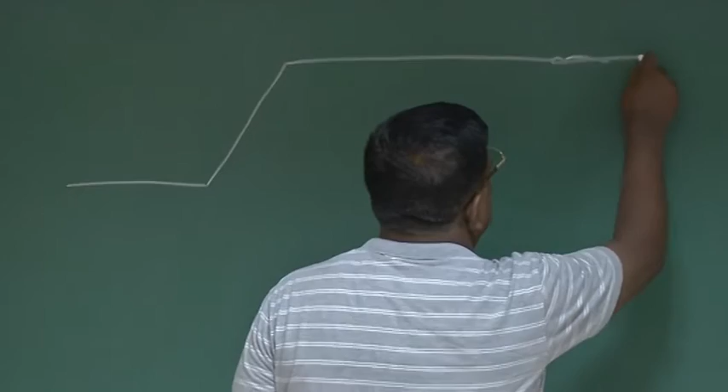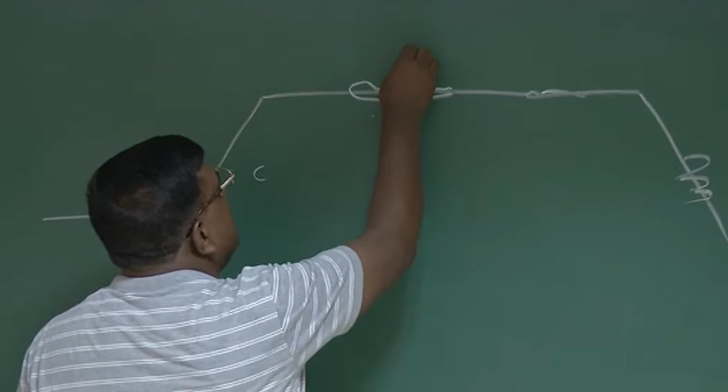And if I try to again pose this problem, we have distinct phases of flight. By now you know, this is takeoff, this is climb, cruise, landing, then maneuver. Now let us take a case when here I am cruising, where lift equal to weight and drag is balanced by thrust.

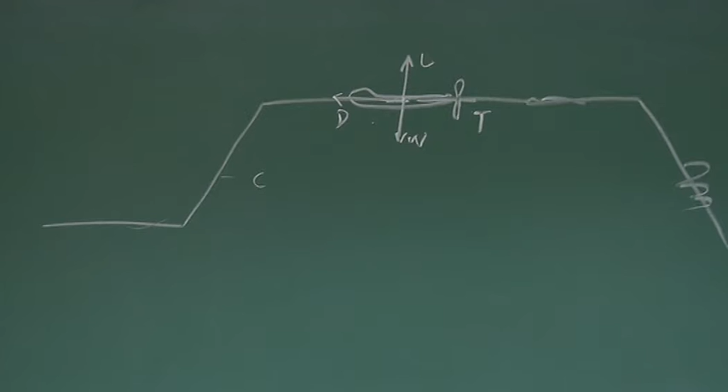We have been always telling that this is unaccelerated flight, unaccelerated rectilinear flight. One thing was net force is zero, the summation of all the forces, aerodynamic force, gravity force and thrust, they are balanced. So we say net acceleration is zero. Also we assume implicitly net moment acting on it is zero.

Now in this part of our extended lecture, we will ask a question. Suppose an airplane is flying like this, and if there is a disturbance, suppose it's going like this and there is an upward gust. What will this upward gust do? It will induce angle of attack.

And the question now is whether this airplane will be stable. That is, whether the airplane will try to manage this disturbance, counter this disturbance, or it will just become unstable and topple. So we are basically trying to focus on a question.

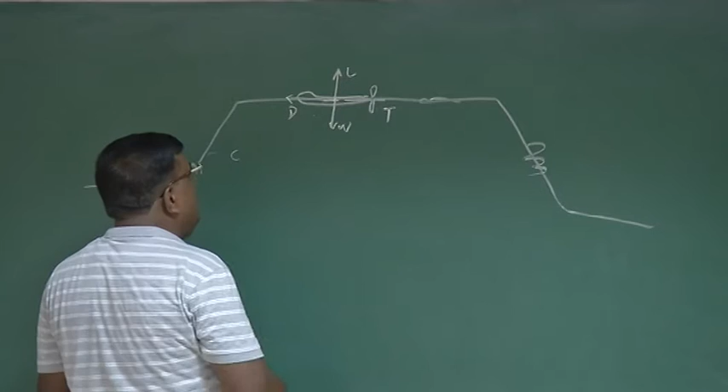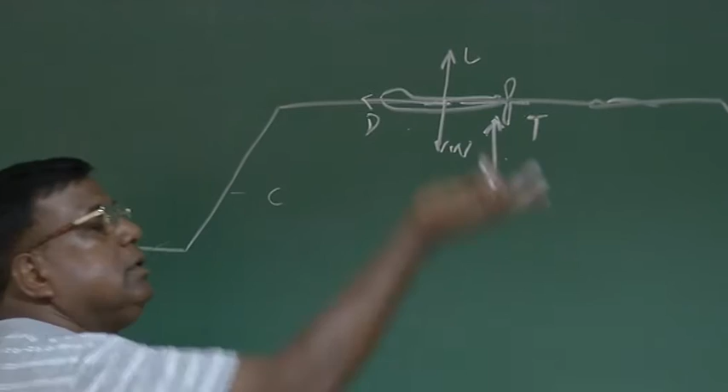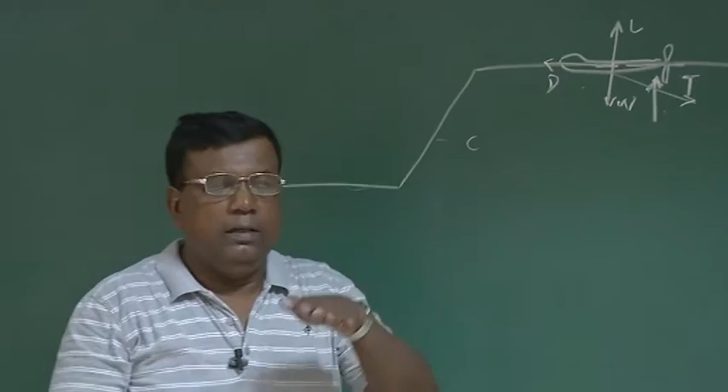Suppose it is going like this and there is an upward gust of wind. Let me draw a little more so that there is clarity. Upward gust coming, and this will naturally induce angle of attack. It will change, there will be a vertical component. So it is going like this, the upward gust, so there is an additional angle of attack.

But I want to fly at a particular angle of attack which was decided by the condition lift equal to weight, right? So we'd like to know whether it possesses stability or not. That is, once it is disturbed, whether it has an initial tendency to come back to the equilibrium or not, that is, come back to the condition of lift equal to weight, thrust equal to drag, or not.

So we'll be asking two questions in a very specific manner. One is initial tendency, and second is within a finite time whether it is coming back to equilibrium or not. One is whether it has initial tendency to come back to the equilibrium or not. Second is in finite time whether it is indeed coming back to the equilibrium or not. Having tendency doesn't guarantee that it will come back to the equilibrium.

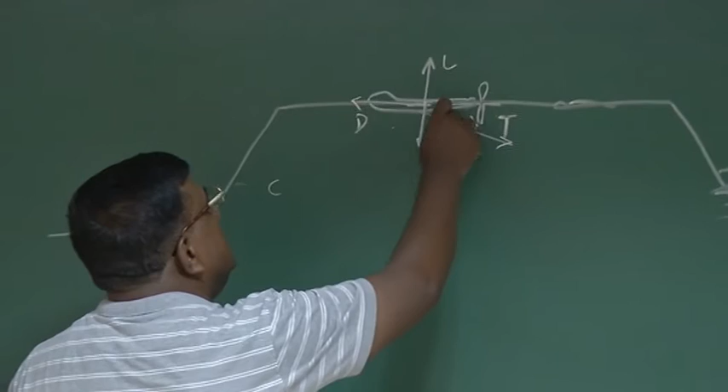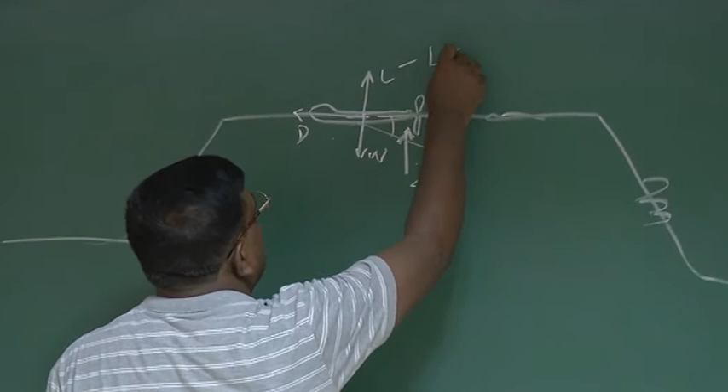What actually happens? You see that the moment there is an upward gust, there is a disturbance, I write delta alpha, small alpha. We are all talking about small angle disturbance, right? The moment there is a small alpha, you will understand this lift will get modified. Lift will become L plus delta L. Drag will become drag plus delta D.

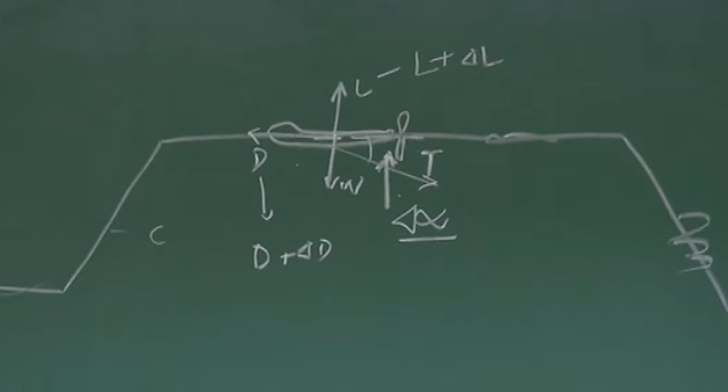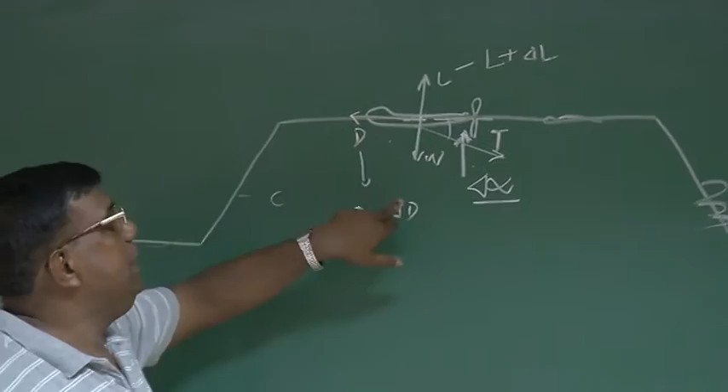So if it has an initial tendency to come back to equilibrium, then it has to do something to ensure that there is an initial tendency to reduce, or to make this delta L go to 0, so that it comes back to the lift, and initial tendency to make delta D 0, so it comes back to the equilibrium condition where lift equal to weight, thrust equal to drag.

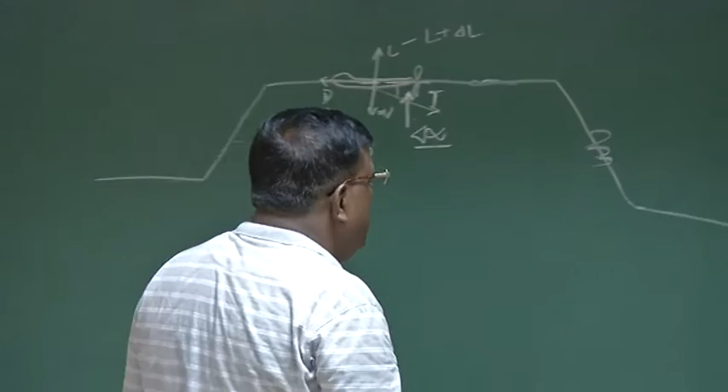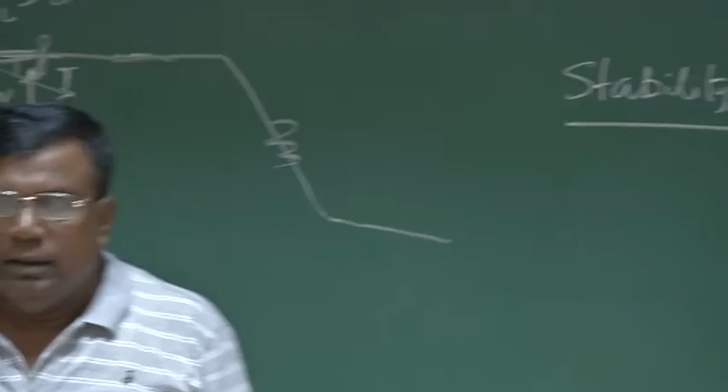If I now take you back to class 11th, 12th, when you were talking about or learning the beginning about stability, which diagram comes to your mind? If you close your eyes, I'm sure all of you will be able to recall a very popular diagram.

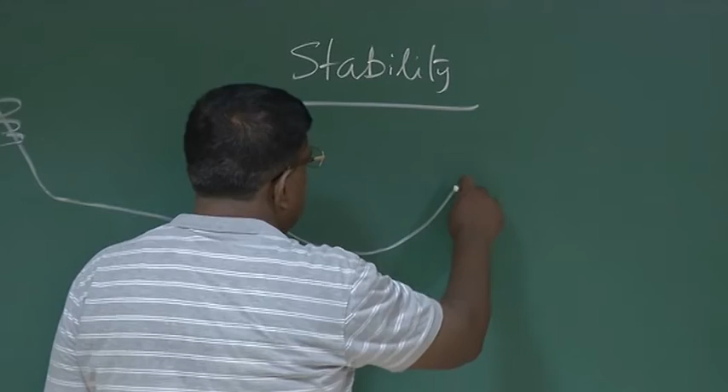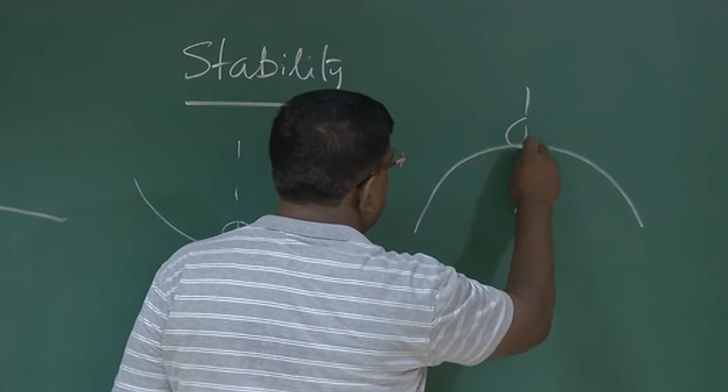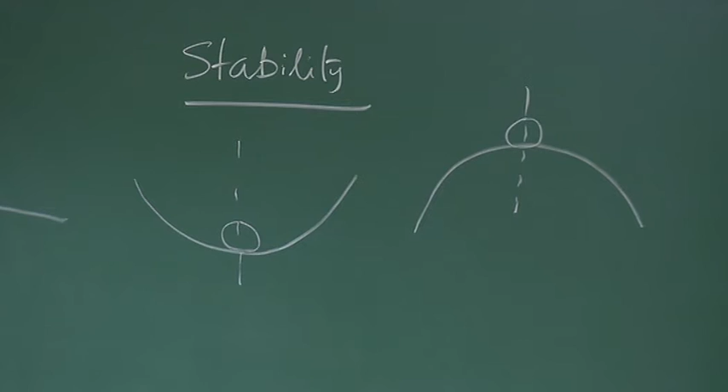What does this diagram remind you about? What really comes to your mind? If I see the dotted line, what is the dotted line? I say this is the equilibrium line.

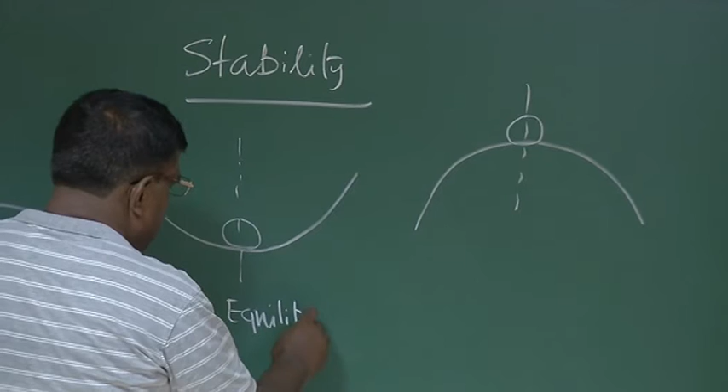You could see here, net force acting on the body is zero because one is weight of the body and there is a reaction from the surface, so they balance each other. So there is no acceleration along this vertical line, so we say it is at equilibrium. Similar situation is here, this is also at equilibrium.

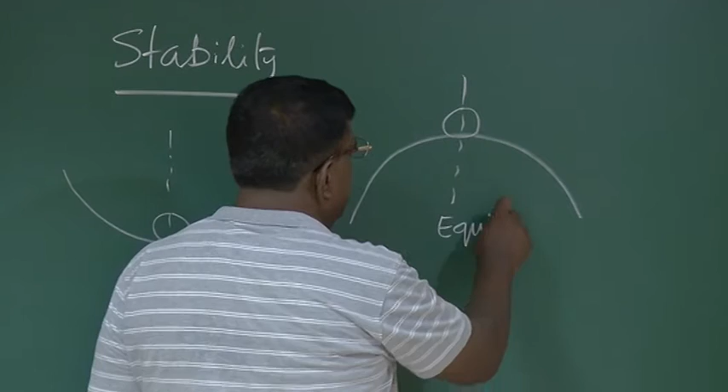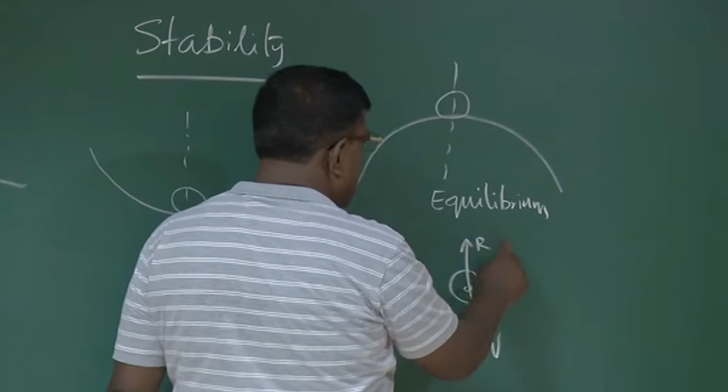And if I again try to make it more explicit, this is the W weight and there is a reaction from the surface, R minus W equal to zero, R equal to W, and that is the consequence of it being in equilibrium. Similarly, there are no other forces which are unbalanced.

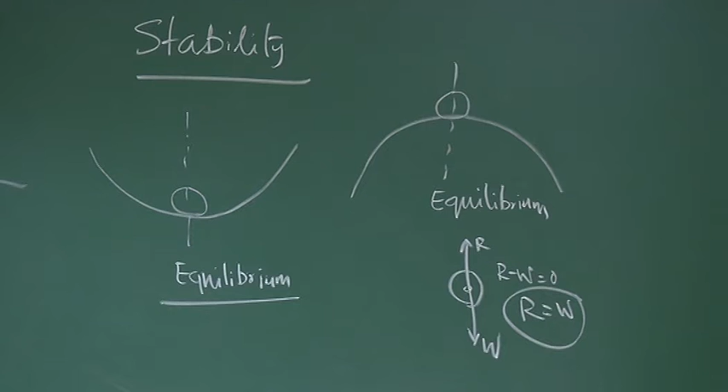But now, please understand, we want to know about stability. So we want to see its behavior vis-a-vis a disturbance.

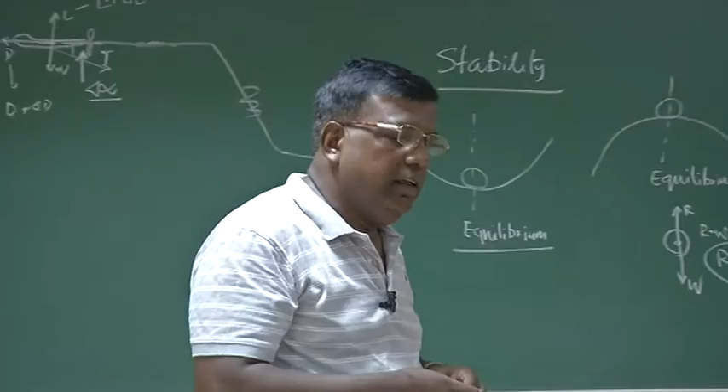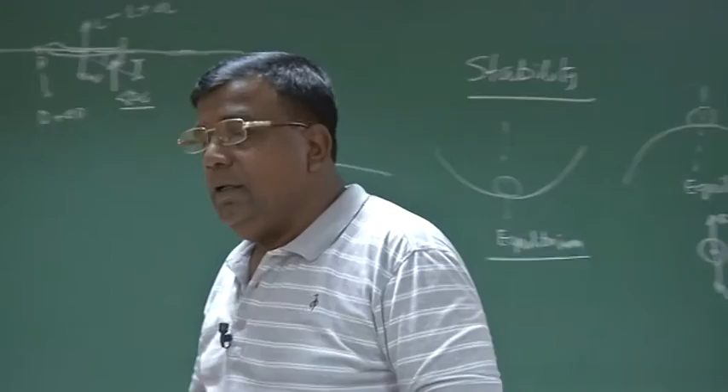You may be having so many friends, few will be your special friends. Among yourself, you must be discussing, this man is very sensitive, this man becomes very violent when he or she encounters slight disturbance. Don't you think so? You might have seen one of your friends reacting very violently for small jokes. And few of them, whatever you do, they don't react.

They remain in their state of calm. So those friends who have this character of not getting disturbed, or even if there is a disturbance, they know how to manage and remain calm - we say he is a stable person. But there are persons whom you slightly crack a joke about and they become violent, they may start fighting. So in our language, we say that man is unstable.

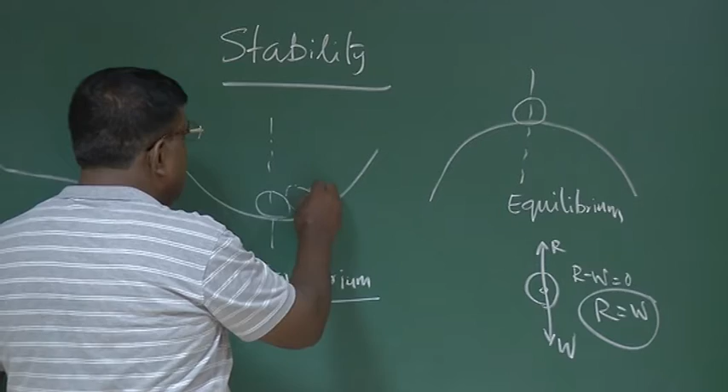Now, if I try to correlate this to this diagram to see whether this body is stable about this equilibrium or not, what I should do is give some disturbance. So if we give a disturbance like this, displacing this body here and leave it, what will happen? Immediately you see this body has an initial tendency to come back to this equilibrium because of this weight component, and then it overshoots.

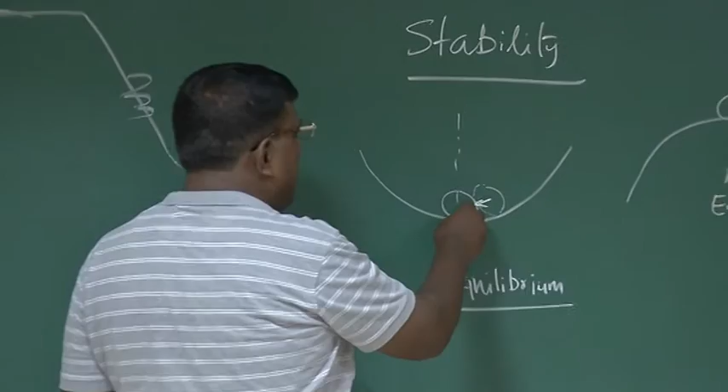Again, the moment it overshoots the equilibrium, immediately there is an initial tendency to come back to the equilibrium. So all the time it has initial tendency to come back to the equilibrium as soon as it is disturbed from the equilibrium. So any system

which, when disturbed from the equilibrium state, has an initial tendency to come back to the equilibrium - the catchword is initial tendency - then we say that system has static stability. Is it clear?

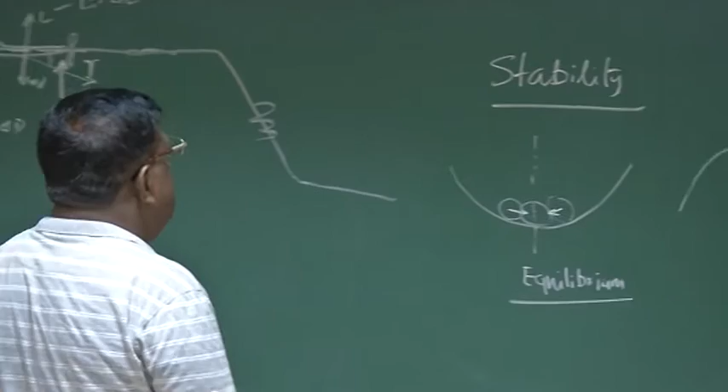Think of another situation which will be more illustrative. This is also from your daily life and you have seen in your textbook - this is a mass spring system.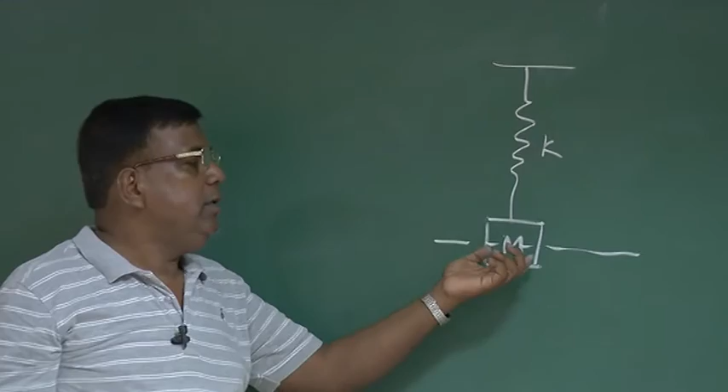You know, if I hang it, there will be a slight extension, and at this point, whatever force or the weight of this mass is balanced by the spring force in the opposite direction. So if I draw it, this is the mass, this is the mg acting here, and spring force k into x, where x is the displacement.

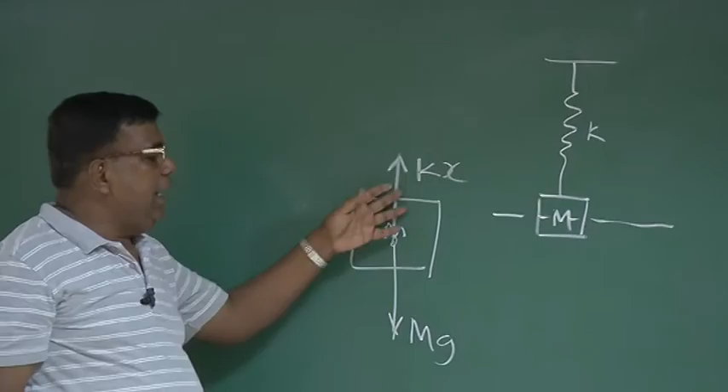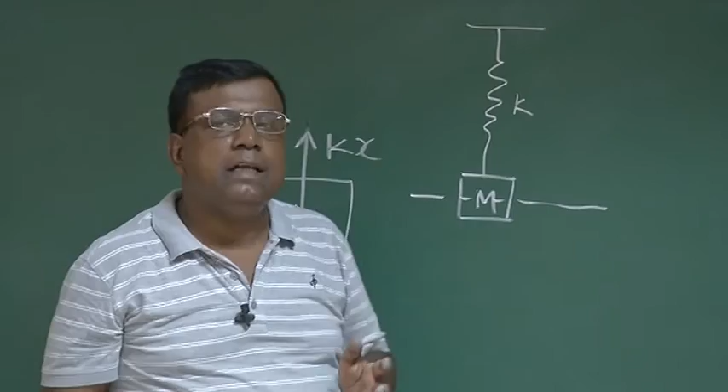So you know that kx is equal to mg, and that is the equilibrium point, and there are no other unbalanced or imbalanced forces. So I call that equilibrium. Now I want to check whether this system is statically stable or not. So what is the rule of thumb?

You introduce a disturbance and release it. Let's see what happens. So I introduce a disturbance, I stretch it to some distance, let's say delta x, and then release it. Stretch it and release it. What will happen?

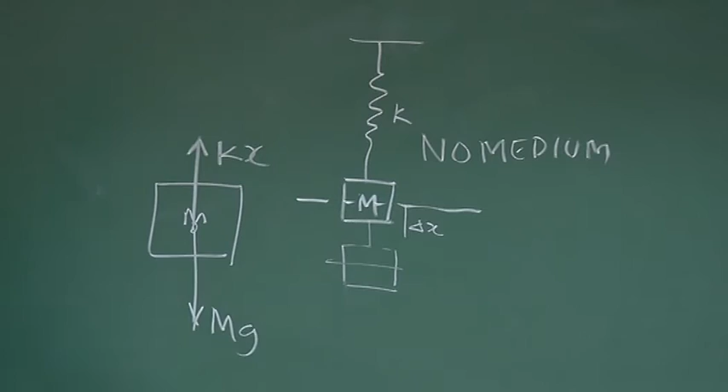If you further assume that the spring is a linear spring and there is no medium - no medium here - what will happen? See, the moment I stretch it from the equilibrium, this mass will be acted upon by an opposing force, a spring force in the opposite direction.

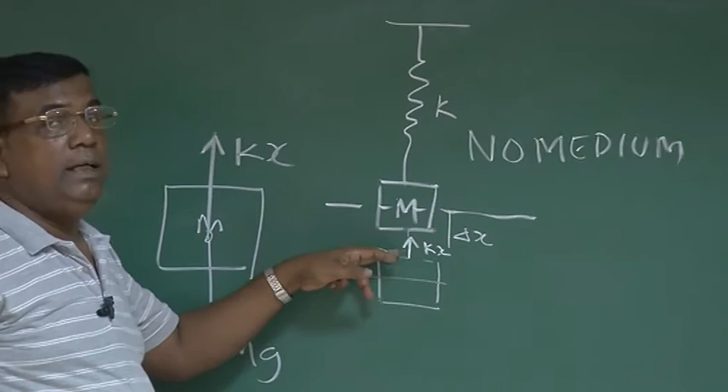So this will have an effect showing the initial tendency of this body to again go back to the equilibrium. If a mass spring system is stretched, then the moment it crosses the equilibrium, immediately a force kx will come in the opposite direction, which will have a tendency to take this mass to the equilibrium. So this system has got initial tendency to come back to equilibrium, and I say this system is also statically stable, like that system.

But what will happen here if there is no medium? This will have an initial tendency, so this kx will act, and it will go and come back somewhere here, right? And it will go on oscillating like this.

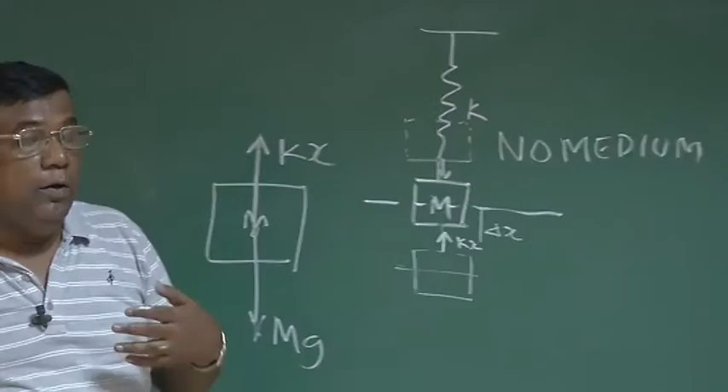As it goes there, again, the moment it crosses the equilibrium, there is a restoring force. It starts applying the moment it crosses the equilibrium line. By inertia it goes to this point, and so it goes on oscillating like this. By definition of static stability, the moment it crosses the equilibrium, it has a force which tries to restore the equilibrium. So this system is statically stable, but nobody guarantees it will come back to the equilibrium. I am talking of a case where there is no medium, so it will go on oscillating like this, and there will be conversion of potential energy and kinetic energy.

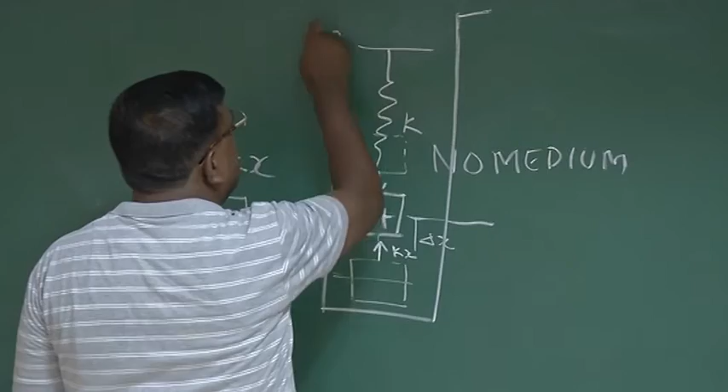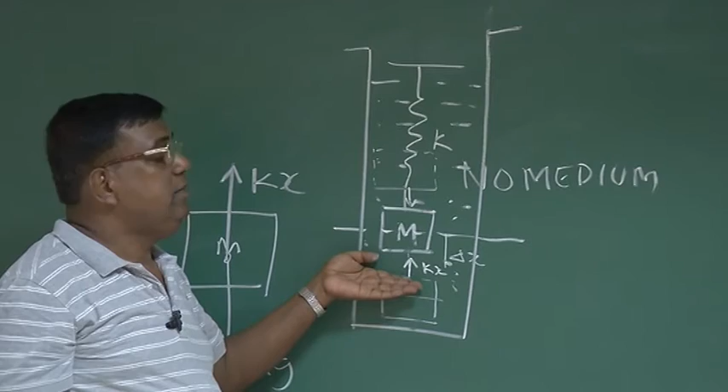But think of a situation if I put this inside a cylinder and put some oil or water, then what will happen? If I stretch it, since it is crossing the equilibrium from here, immediately kx, the restoring force, will start acting. So it has the initial tendency, it will exhibit static stability, try to go towards the equilibrium. Now because oil or water is there, it will start oscillating in a manner that amplitude will go on reducing, because there is a lot of friction with the water or oil. We will say this system will have some sort of a damping force.

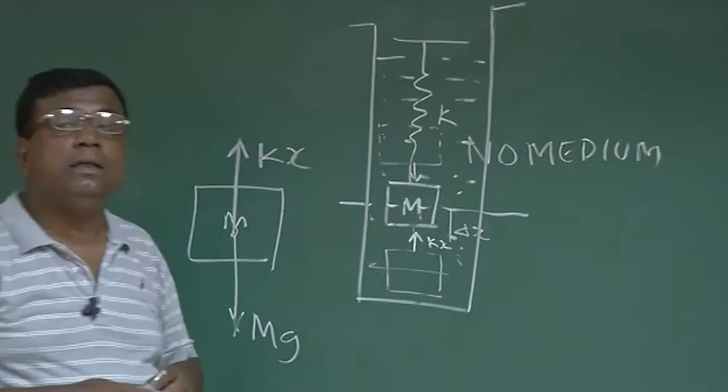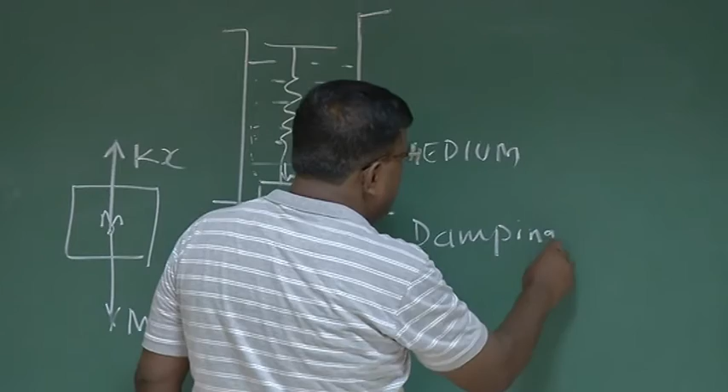Damping force means the force is proportional to the rate of the motion, displacement. For this discussion, it is good enough to know that you need damping where the force will be proportional to the rate of displacement, x dot, or if it is a moment, then it's proportional to the angular rate. Let's say theta is the angle, angular rate.

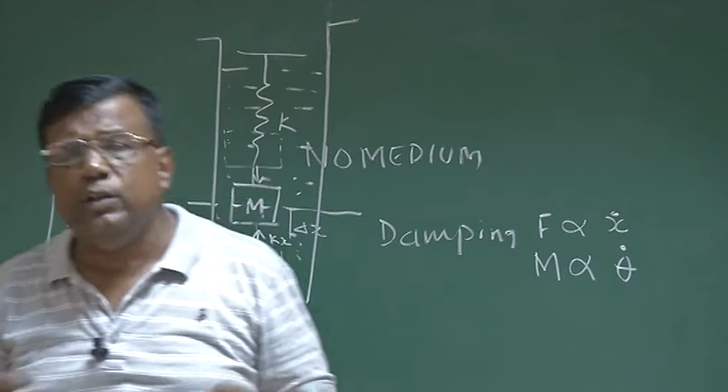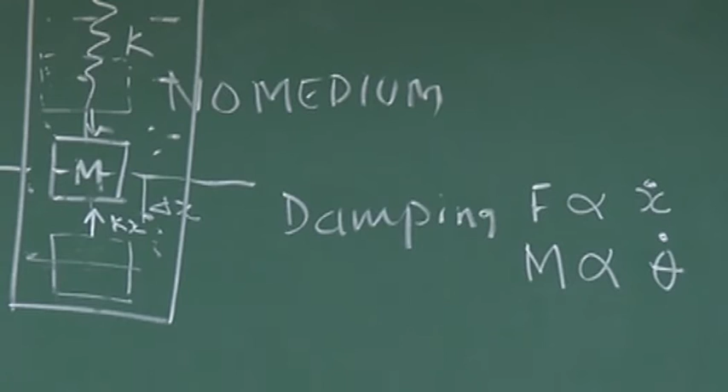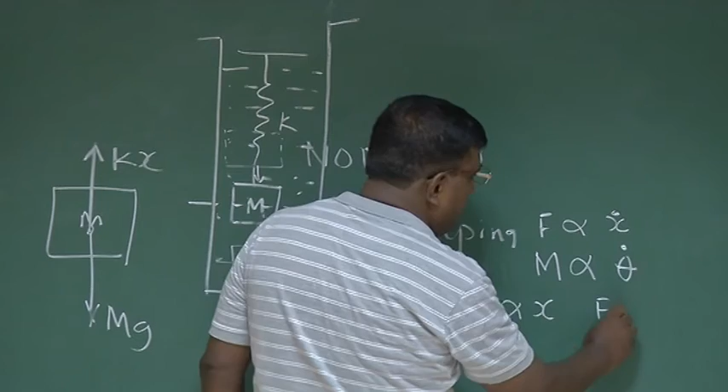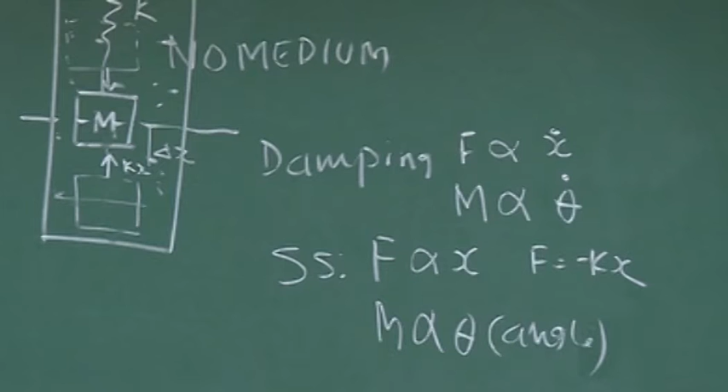More importantly, damping is proportional to the rate of change of the state of the body with reference to the equilibrium. What we are talking about with static stability is that force proportional to the displacement, because F equals minus kx, or moment is proportional to the angle. Theta I am using as a notation for angle, and theta dot is angular rate. Mostly we will be talking about static stability in this part of the course.

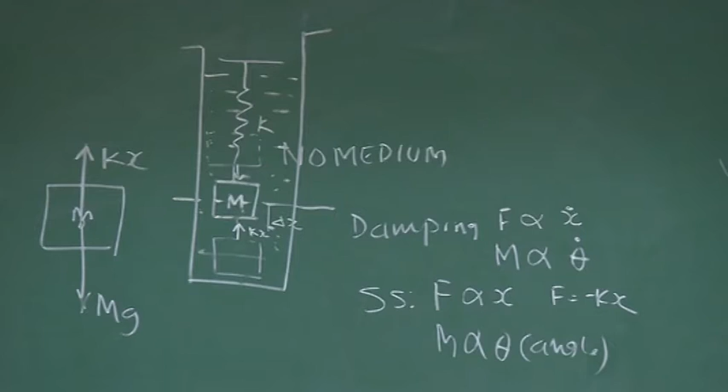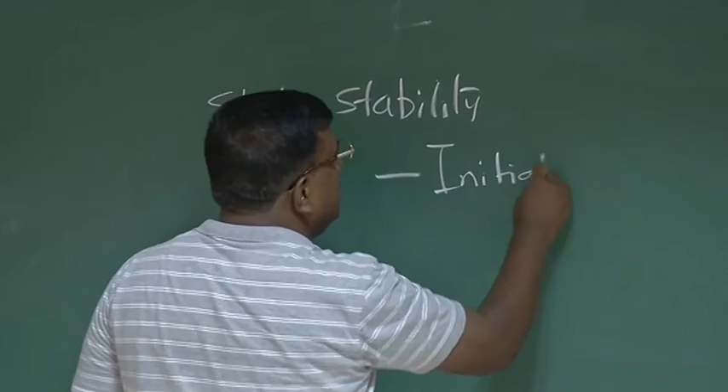Let us try to ask ourselves what we have discussed up to this point: that we have talked about static stability, and the catchword is initial tendency to come back to equilibrium state.

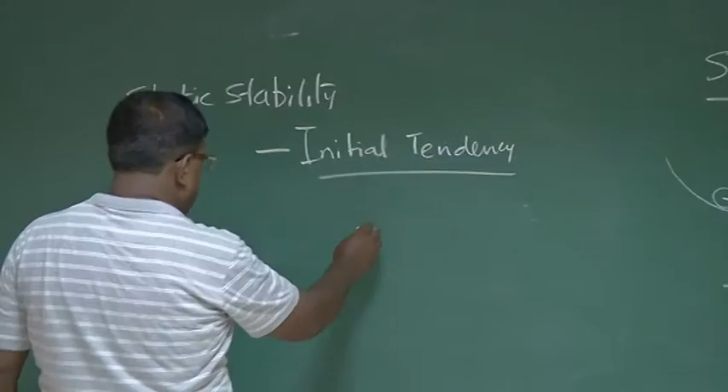Now coming back to aircraft. In this part of the lecture, perhaps in this course, we are focused towards angular stability. That is, if the aircraft angle is disturbed, whether it has initial tendency to come back to the original angle or not. If the aircraft is flying like this, if I disturb it, whether there will be a restoring moment which will ensure that the moment the aircraft crosses the equilibrium, the restoring moment will come to ensure there is an initial tendency to come back to the equilibrium. To that part, we will be talking in terms of static stability for the aircraft.

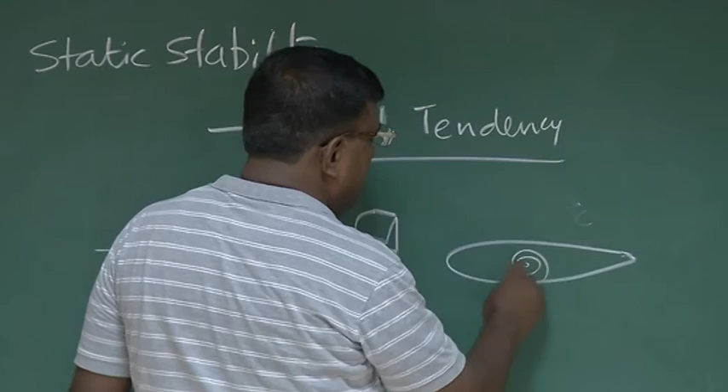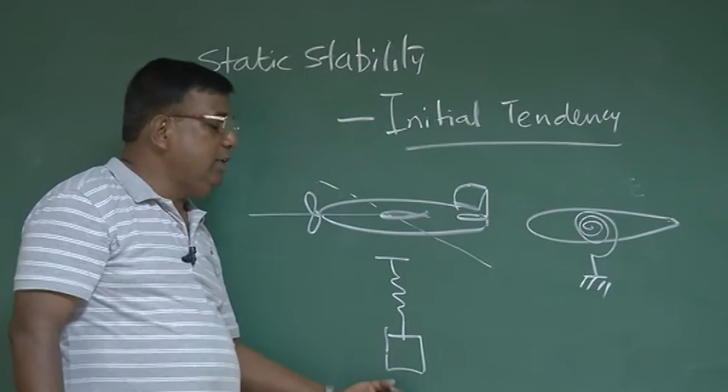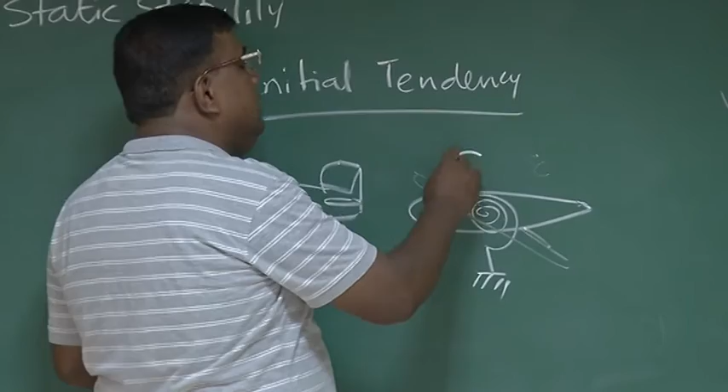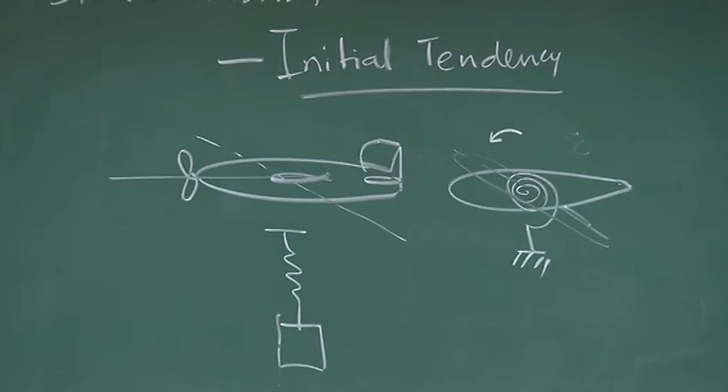And if I try to model it, I will model it like this: this is the aircraft, and I put a coil spring. For a mass spring damper system, we modeled it like that. Here we say, if I disturb it, it has the initial tendency to come back to equilibrium. Disturbance will be, I disturb it like this. The moment I disturb it, this coiled spring will generate a nose down moment, which will ensure that it has initial tendency to come back to equilibrium. This is what we will be discussing in this part of the lecture, maybe another one or two more lectures on that. But try to see this carefully.

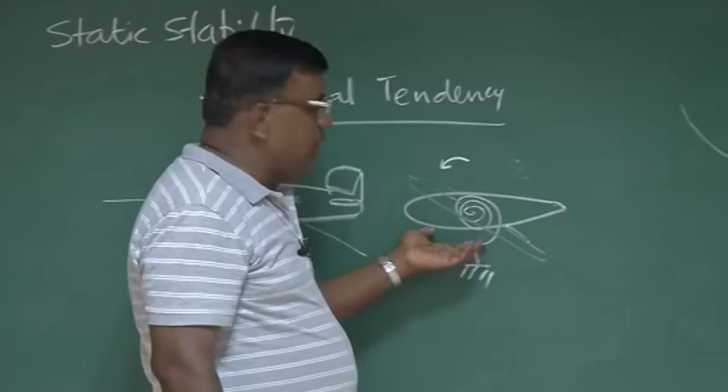If there were no coiled spring, then I will not get any restoring moment. But when an aircraft is flying, there are no springs like that. This initial tendency, through a moment, has to be generated by interacting with the air. And that is where the whole designer will be focusing on, to make an aircraft statically stable. So he has to identify a part of the airplane which should be responsible primarily to give that nose down moment if the angle of attack is increased, a nose up moment if angle of attack is decreased, to ensure there is an initial tendency. We are trying to search for this answer.

What is that component? So, question 1, we are addressing static stability.

Question number 2, again let us see this model. So question number 1 is, we are trying to address the issue of static stability, finding that component of the airplane which will provide static stability. And question number 2 is very, very important, related to controlling the aircraft.

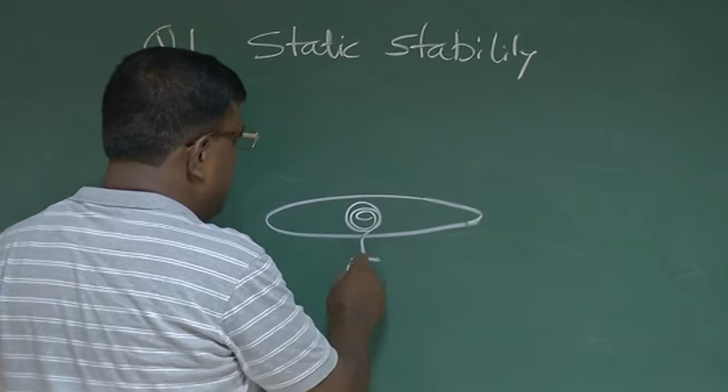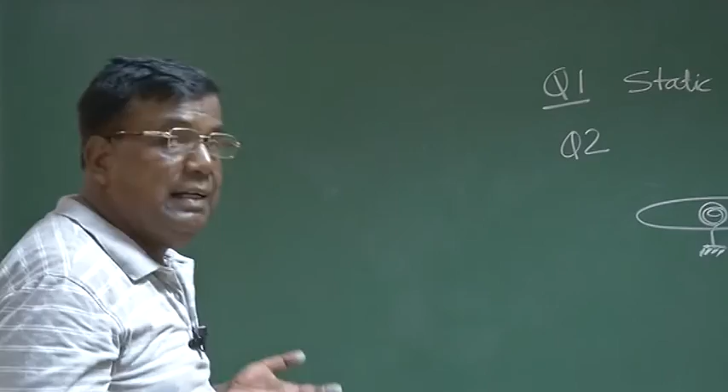Through this schematic model, suppose there is a spring type which I have represented here. By now we know that there won't be any physical spring when the airplane is flying, right? The spring-like action has to be generated by interacting with air, and we have to identify which component will do that job. Let's see what is available. So that is what is represented here. It will resist any change of the attitude of this airplane.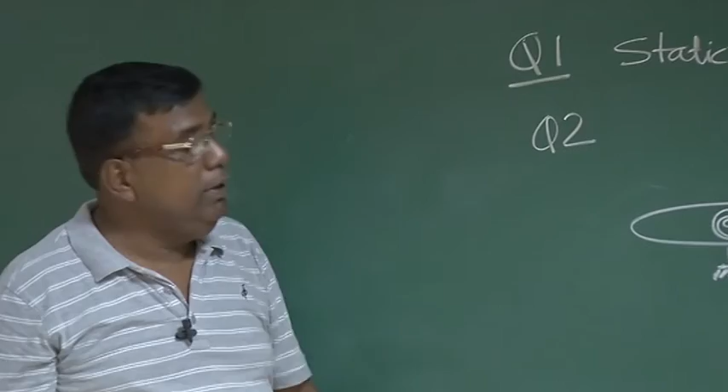But now tell me, you are flying at a speed v and it has a corresponding CL, so that lift equals weight. Now you want to fly at a higher speed, still maintaining lift equal to weight. So what do you have to do? Since the speed is higher, now you have to reduce the angle of attack because you have to reduce the CL. Reverse way, suppose I am flying at a lower speed and CL is say 0.5.

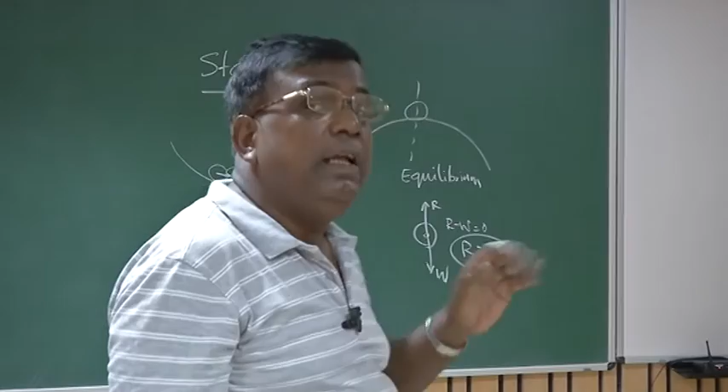So let's say angle of attack is 4 degrees. Now you want to fly at a lower speed, so your CL has to be more, so you have to raise the angle of attack. So you have to ensure that depending upon speed, depending upon the altitude, you should be able to change the angle of attack of the airplane, or you can change the attitude of the airplane. But you have made the aircraft statically stable, so any moment you want to change it, it will say nothing doing, I'll try to come back to the equilibrium.

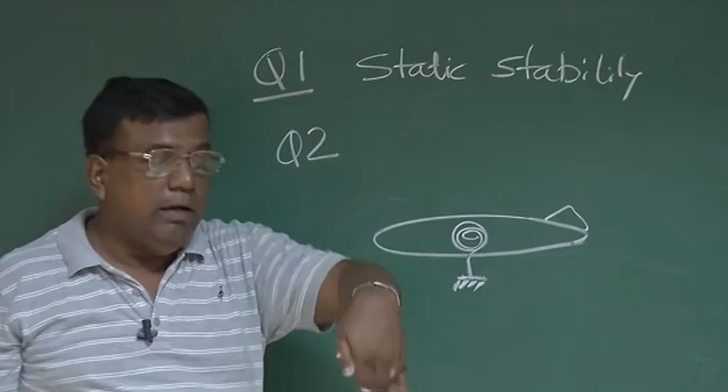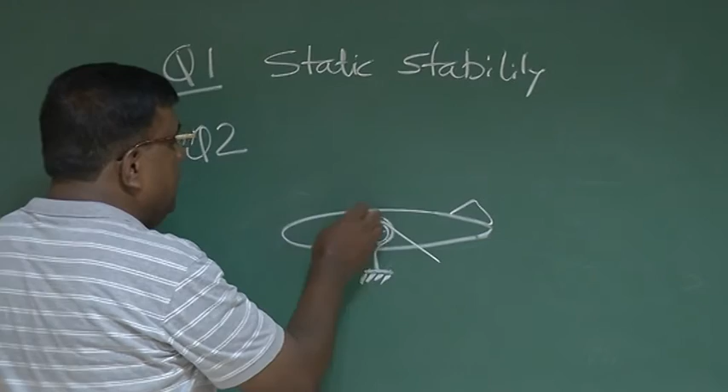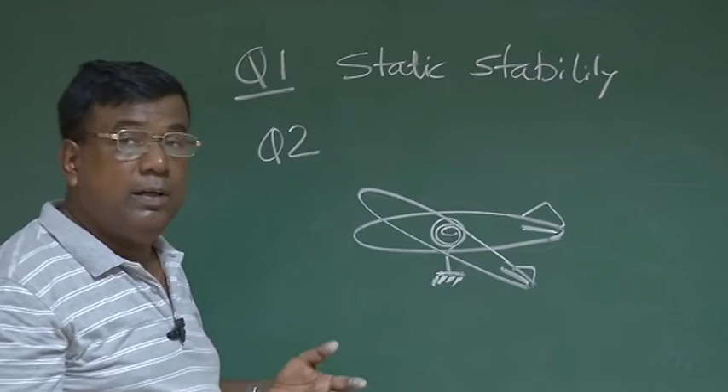This is a real problem. So what you have to do, if you have to really ensure that the airplane now has an attitude like this, and this spring is still there as a model - I'm trying to represent that somebody is generating the restoring force, or restoring moment in this case, because it is statically stable. It is discouraging any change. So if you now want to really fly at this angle,

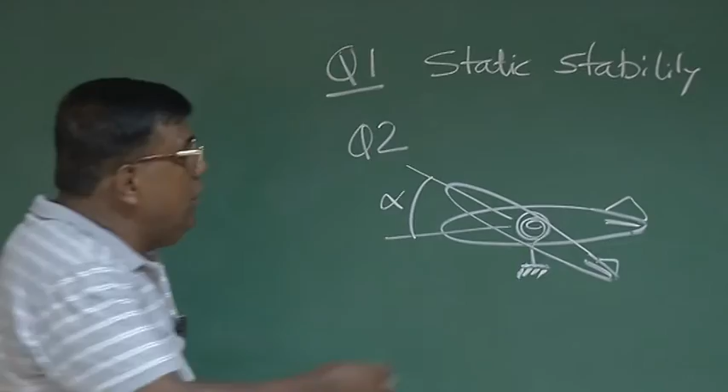you have to hold it. So you have to generate a force here which will give a moment, and this moment should be equal to the restoring moment because of this spring. So now at this attitude, net moment again will become 0. So this becomes your another equilibrium.

And at this equilibrium, since the aircraft is stable, if there is a further disturbance, the aircraft will try to maintain this equilibrium. So what is the message? If something is statically stable, if you want to go to another condition, for example from one angle of attack to another, I have to ensure a moment to overcome the restoring tendency because this is statically stable. And this is what is called a control problem.

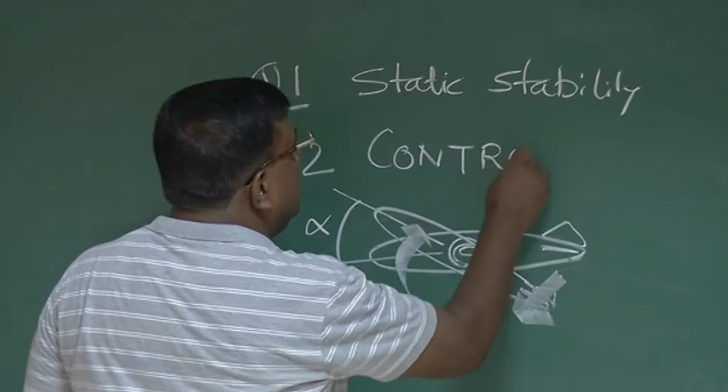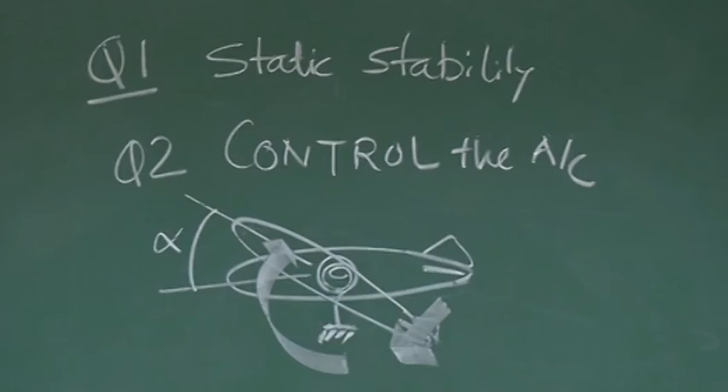So not only static stability, now second question is how do I control the aircraft? Is the question clear? If something is very highly stable, in our language it is difficult to control, because if it is highly stable, it will not like to change from its own equilibrium. It will resist going to another equilibrium because it's highly stable.

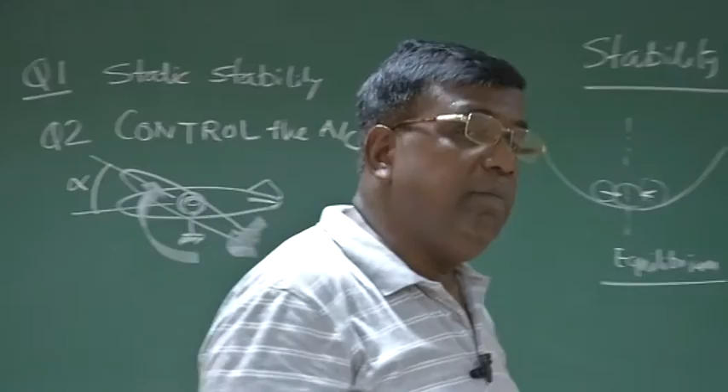So you have to apply a huge control moment to really take it up. So there is a limit - how much stability or static stability you want so that you can comfortably control the airplane. And that is the biggest challenge for the designer, because finally you understand this airplane will be flown by pilots, by human beings. Even if nowadays so many actuators and control systems are there, you have to also think of the actuators. You should not overtax the actuator, you should not overload the actuators. That's not a good design.

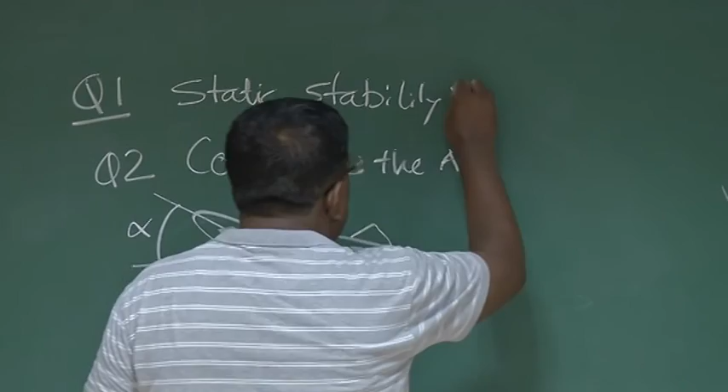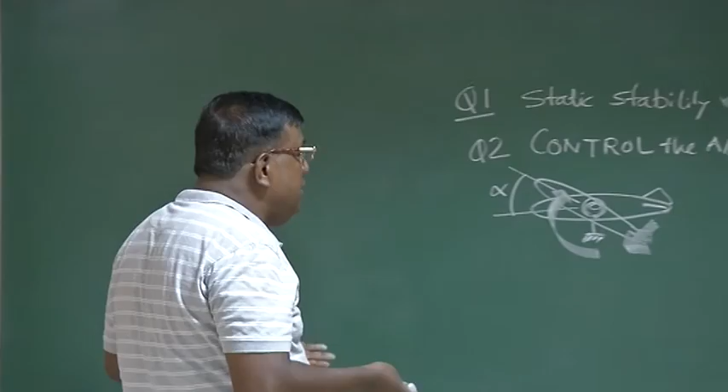So we will now explicitly see what do you mean by static stability, how do we give static stability to an aircraft, like a spring back action type for ensuring static stability, and also how do we control the aircraft. If we understand these two things, and if we understand their relationship, the job is done. Okay? Thank you.